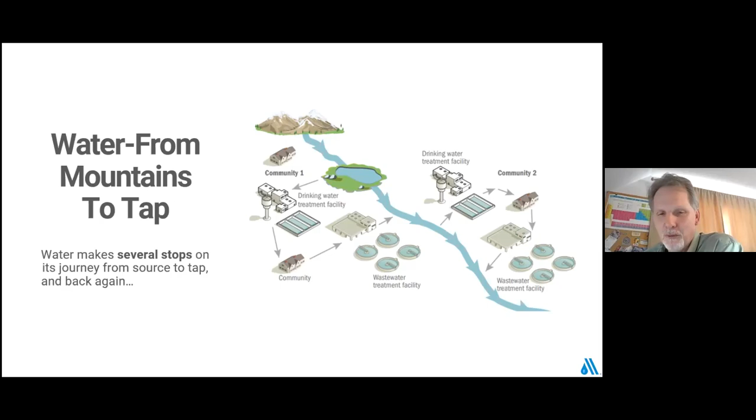Just ask yourselves right now, it's 3:30, 4 o'clock in the afternoon. If you had to guess how many times you've used tap water today, could you get close? My guess is most of you would underestimate. Most folks do, even though it may not be a bunch of water at one time, between brushing your teeth or making some breakfast or some tea or some coffee or washing your hands. It certainly is used far more often than most folks realize, because largely in the US, you can count on the water to be there when you turn the tap on. And that is not the case in a good part of the rest of the world.

And I meant to give you a statistic there when we talk about the importance of the provision of safe drinking water, and I got sidetracked as I was looking at the day in the life of a drop of water diagram there. But each year, according to the World Health Organization, there's an estimated 2 million deaths worldwide related to waterborne disease. About 90% of those deaths are children under the age of 5. Things like cholera and dysentery, typhoid, things of that nature.

And most of you in attendance today would probably be pretty hard pressed to name the most recent or the biggest waterborne disease outbreak that you've heard about in the United States, or even besides a waterborne disease outbreak, a water quality issue that impacted the health of the community. Certainly Flint, Michigan is one that most everybody's heard about over the last few years. But in terms of a waterborne disease outbreak, that's part of how effectively we apply the multiple barrier treatment concept in the US. And I'll talk about that here in a few slides.

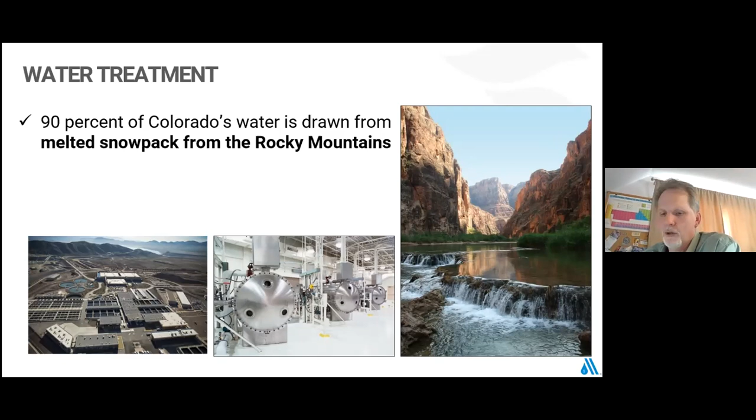So I mentioned just a few minutes ago that about 90% of our water is drawn from the snowpack in the Rocky Mountains. But as far as our water resources go, like I said, all the folks are on this side of the mountain, and Mother Nature and gravity take most of our natural rainfall to the west. And that creates some water resource issues and constraints, certainly here in the Front Range.

If it's in and around a city, there's any number of things. It could be runoff from roadways and impervious surfaces, vehicle fluids, things of that nature. More rural areas, it might be impacted by agriculture or septic systems that aren't functioning the way that they were designed. And just simply runoff with soil and sedimentation and turbidity and things of that nature. Wildlife and their waste streams. So there's stuff in that water that needs to be removed in order for it to be safe for drinking.

So coagulation and flocculation are key to effective filtration practices. If we were to take a mud puddle after a good rain, and we were to scoop it up in a clear pitcher, and we would just let it set on a table for an hour, and we were to come back, we'd see that down in the bottom of that pitcher is a pretty noticeable layer of silt. And this is the big stuff. This is what's going to settle out naturally without any help from us.

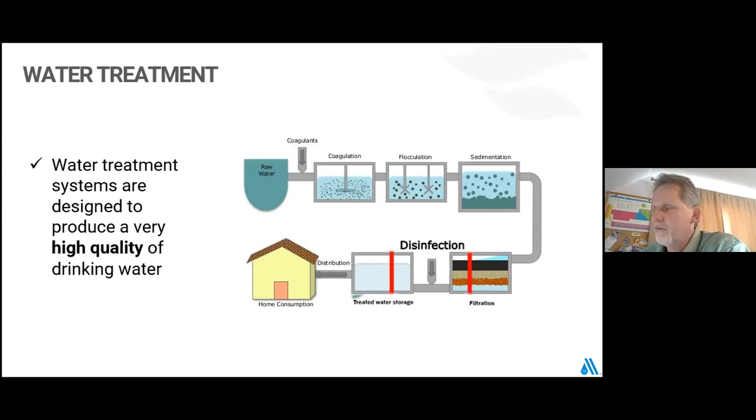And the more dirt and stuff we remove, the more bacteria and virus and microbial contaminants that can cause public health issues are being removed. And then we try to disinfect later in the process. Now that we've removed a lot of the interfering contaminants or substances, now we can disinfect, and a much larger percentage of the disinfectant goes to inactivating microorganisms and virus, as opposed to being soaked up by the dirt and other stuff that's in there. So this is all kind of part of this multiple barrier treatment concept. They're all critical.

And, in the interest of time, I want to give you a flyover so we can spend more time talking about GIS. But what sort of professions, what sort of skills really lend themselves to being in this industry? A big, wide range. Operators don't even really necessarily have to have a technical background. It certainly helps, but if they don't know chemistry and biology, but they have a mechanical aptitude, there's a place for somebody to be an operator, because that's part of what they do too, is inspecting pumps and pipes and valves, and if that stuff doesn't work, then the water treatment process doesn't work either.

Maintenance engineers, design engineers, laboratory technicians, and then certainly planners and schedulers. Anytime that we have large projects, whether it's a large pipe replacement project or a treatment plant capital improvement project, that isn't something that you just decide to roll up your sleeves and get busy next week.

It needs to be planned over time so that the appropriate people are brought in during the right phase. There may be plant shutdowns or parts of the system that need to be shut down to facilitate the project. That has to be planned in advance.

In some way, it's kind of similar to a roadway project. You can't just shut down a major highway for an indefinite period of time. You need to plan the project to minimize the impact on the operation while you're trying to help it along the way.

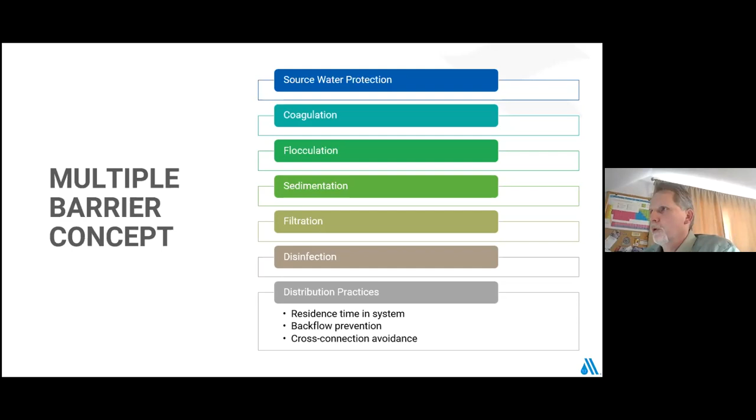So why do we need those? Well, I guess I'd say don't put all your eggs in one basket. Any one of these barriers can fail for some reason. We could think about Boulder, Colorado. We could have a 100-year flood, and there can be more turbidity than we would normally have any reason to expect coming into the plant.

It's not designed for that. So we can still, through coagulation and flocculation, settle a lot of that. We can filter it, we can disinfect. And so we have multiple tools in our box for when life throws curves at us.

Also, some of the microorganisms that we're trying to remove, like viruses, are so small that they can pass through filters. So we need to have coagulation and flocculation to catch them and clump them into larger particles. And if somehow, some way, something still passes through all that, we have the disinfection process to inactivate them so that they can't make people sick.

it might be too hot or too cold, or the pH is wrong, or maybe there's a disinfectant present, they have the ability to, in essence, go into their shell and hide from those harsh elements in their environment. And then when they're in the right environment, which might be after a person's ingested them and they're down inside a warm-blooded animal, they can come out and become infective again. So they're resistant to disinfection.

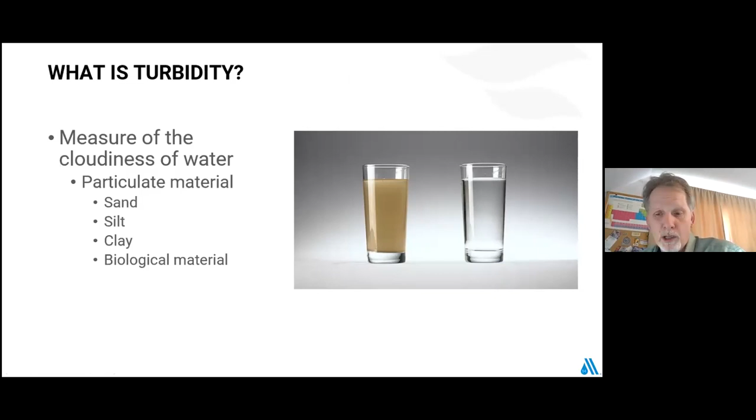Let me see if I can back up a slide here. Okay, so this water right here on the left would be probably maybe 100 or 200 NTU. That's some pretty muddy water that you might see in a mud puddle or in a creek after a good rain. And then that looks like treated drinking water, something you might get out of the water fountain or your tap. And that's probably 0.1 NTU or less. So very, very clear water.

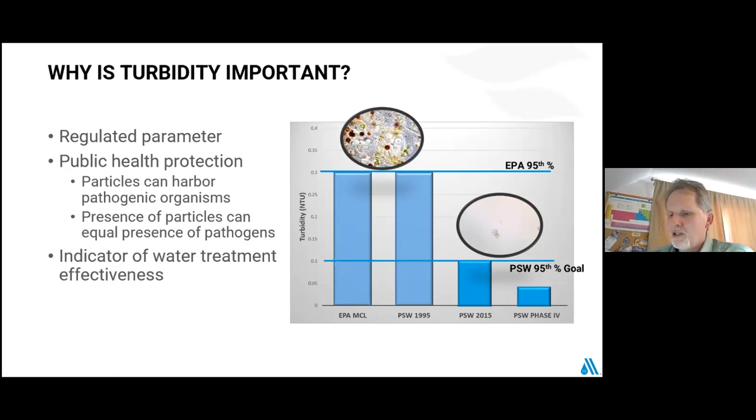So you come over here and you see microscopically, even though this water on that inset of the slide on the top is 0.3 NTU water, it complies with the regulations. Microscopically, you go, whoa, there's still stuff going on in there. But as we go down towards 0.1 NTU or less, comparatively, it's a snapshot, but you see that that's much, much cleaner water. As we start to really look at cyst removal, I looked for this slide. I'll try to find it and send it to you guys. But I wanted to keep this in here even as a blank.

As we go below 0.1 NTU, Giardia and Crypto, they have the cyst forms. They're in the range of say 2 microns to 10 microns in size. They're very, very small organisms. As we go below 0.1 NTU in water, we see an exponential rise in the log removal. We see much, much higher percentage removals of these cyst forms. So we're not killing them or inactivating them, but we are removing them from the water. So the cleaner the water, the better job we're doing of removing these types of pathogenic organisms.

We talked about water distribution. It'll be great for you guys to go back and look at this, but I talked about it already as part of the multiple barrier treatment concept. And it is the last mile. You can do all the good in the world to treat the water, but with all this construction going on and infrastructure, you have pipes anywhere from brand new to, I'm sure the city of Denver has water pipes in the ground that are more than 100 years old. It's a fact of life in most metropolitan cities. Some of them maybe quite a bit older. You might be shocked to know how old some of the pipes in the ground are.

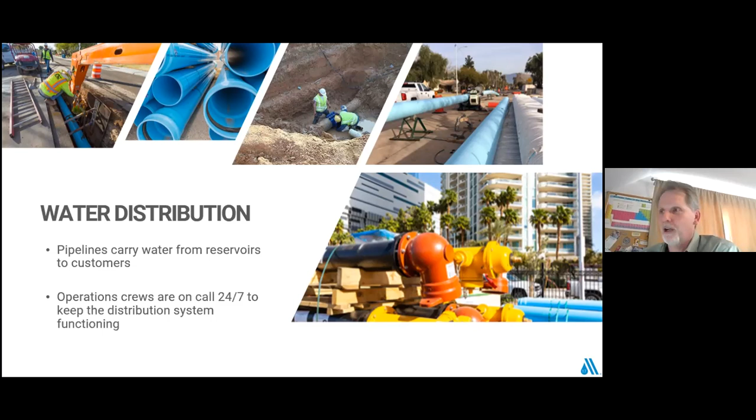So, just a high level overview, distribution systems are very, very complex, right? The way that I typically describe a water treatment plant is kind of like the heart of the city. And then the distribution system, you have these major, like your aorta, large vessels that carry it away. And as you get further away from industry and downtown and into residential areas, now your arteries are smaller and smaller. Think capillaries, right? So anywhere that you have a rupture along the way, now you have a problem with the circulation in this overall body that we're talking about.

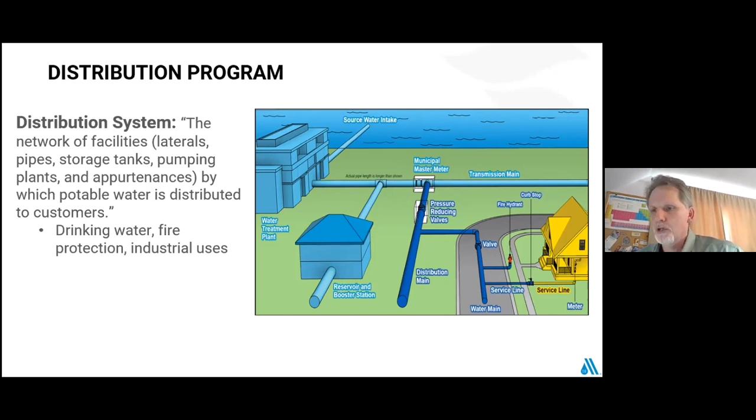And we have thousands of restaurants and businesses that are all tapped into this and have the potential to have something go wrong in their treatment process or their backflow protection that could impart contaminants. So there is a lot more going on at any water utility than just treating water and putting it in the pipe. We need to shepherd it all the way to the end user.

Maintenance is all part of this as well. I'll talk about this at the tail end, but I wanted to give you a really good idea of the universe of jobs and skills and backgrounds that it really takes to provide safe drinking water, to study our natural waters, to treat wastewater effectively. And there's about a couple of dozen different types of jobs and careers that somebody with GIS skills could immediately plug in and be a huge part of a successful team.

Water system maintenance, asset management programs, knowing exactly where your infrastructure assets are. Obviously, it's not just mapping. There's a ton of information resident in those files. Date of install, materials of construction, any sort of other thing like that. And so that's all about turning data into information so that folks can do their jobs more effectively.

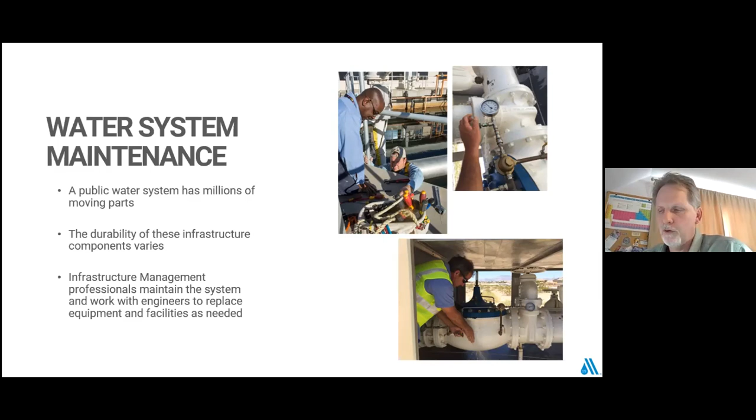Now, I said from source to tap and back again, the wastewater treatment process, and I already alluded to the removal of phosphorus as being a key concern in the US. Corrosion control on the drinking water side: as science has advanced, we're really starting to key on the use of phosphorus to sequester lead. If you were to go back into the early 1900s, there were a lot of cities in the US that not only used lead preferentially, some of them by ordinance required it.

And if you ever stop to think about the origin of the word plumber, the Latin word for lead is plumbum. So it really comes out of lead, and that's the reason that plumbers like to use lead. It's easy to bend. It doesn't kink like copper. And so it wasn't anything about health. It was easy to work with and it didn't leak. And so it was used an awful lot.

So, GIS wasn't a thing back in the early 1900s, but as we update our asset inventories, where stuff is and what stuff is, converting those old analog or index card or post-it note type records into GIS inventories of assets is more than a quantum leap forward for these systems and being able to protect public health.

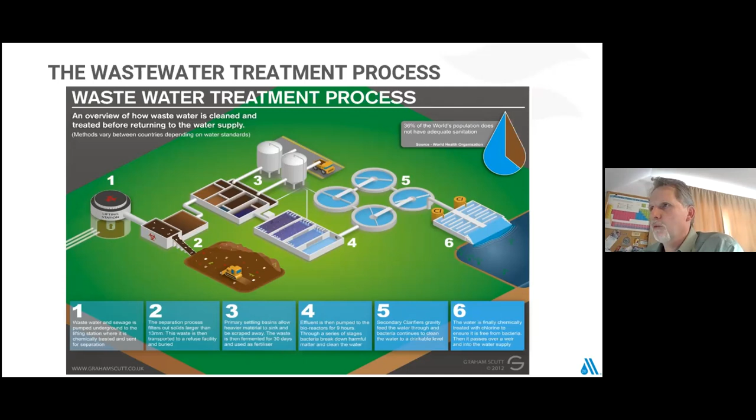And then the wastewater treatment processes have to work in concert with the drinking water utilities in the town, because whatever drinking water treatment facilities are putting into the water, that's something that wastewater plants need to know about. They ultimately have permits to meet before discharging back to natural waters of the state. And that varies depending on what part of the country you're in. We're in a pretty environmentally conscious part of the country here.

I did my doctoral work in Reno, Nevada, and Lake Tahoe is right there, probably about as environmentally conscious a part of the country as you could find. And so you tend to have tighter wastewater discharge limitations in those parts of the country than you might have, say, along the Mississippi River, where they lean on dilution being the solution to pollution a little bit more.

So I'll do a light speed overview of partnership programs, because I want to give us plenty of time to talk about GIS and then have some discussion at the end. So all the stuff that we've been talking about over these last 30 or 40 minutes, the partnership programs that I manage, the continuous improvement and optimization programs, help utilities look at their treatment processes and their distribution management processes, to assess how we measure up against industry standards. Are we going above and beyond regulations?

We aspire to do more than meet a 0.3 NTU turbidity standard. We like to see our systems be at 0.1 NTU or less, because that is a much superior water that is much more protective of public health. And I apologize, I can't remember, but there may be a slide in here about the genesis event for the partnership.

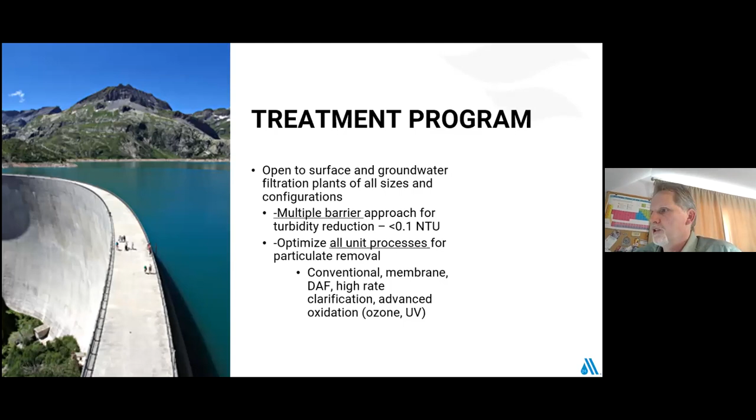Distribution program, I've already talked about an overview of all the challenges and priorities. And we asked them to look at all sorts of considerations. How well do they maintain residual? Do they have a main replacement program? Do they maintain their tanks? Do they clean and inspect their tanks with some routine frequency so that they're not impacting water quality? What about their backflow and cross connection prevention and control programs?

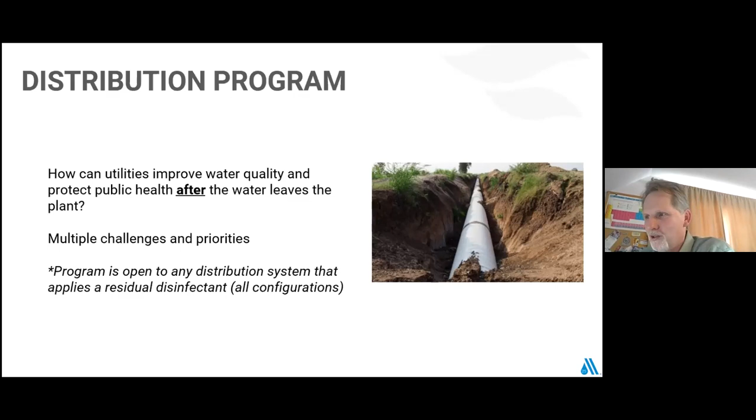All of those things force them to take a deeper dive into, are they really doing the best that they can to protect public health, or are they just striving to comply with the minimum regulations? We already talked about the turbidity guidelines. So right now, if you were to look at the surface water treatment rule, an absolute slam dunk, you have broken the rules, would be 1 NTU.

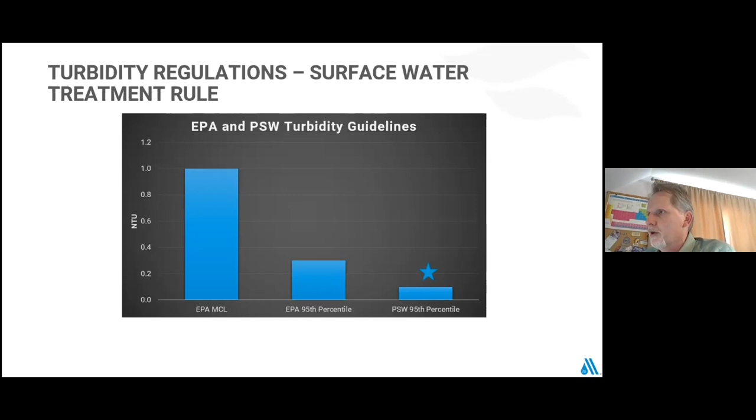But further than that, what the surface water rule requires is that utilities be 0.3 NTU or less 95% or more of the time. In our program, and you see in the bar to the far right, we ask utilities to strive to be at 0.1 NTU or less more than 95% of the time. And you'll recall that comparison of the microscopic slides from just a little bit earlier.

And actually our excellence plants, which is the very highest level of performance in our program, are at 0.04 NTU, 99% or more of the time. What they have found over time with this commitment to continuous improvement is they can always find ways to do just a little bit better and improve on their efforts to protect public health.

And then we also have the Partnership for Clean Water, which is a wastewater treatment optimization and energy usage optimization program as well. It's the newest of the programs, but we have about 120 wastewater facilities around the country that are part of this. All in all, the partnership programs and the facilities that are part of them serve about 140 million people on a daily basis in the United States. So a little bit more than a third of the country is impacted by this adherence to these optimization principles.

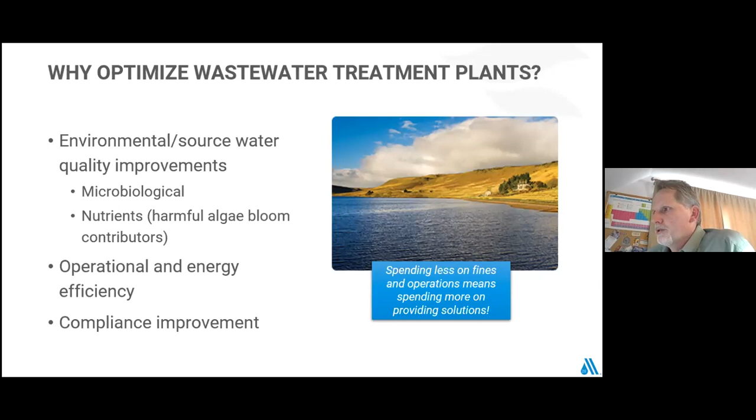I think you guys understand why we would want to optimize wastewater treatment plants. We talked about reducing nutrient loading out there, which can certainly decrease harmful algal bloom issues, eutrophication issues. Wastewater treatment's hugely energy intensive as well. So there's an opportunity to do the most good economically by further optimizing operations.

So we try to go above and beyond regulations. We certainly want to be tenacious and avoid complacency. We don't want to just comply. We want to do the very best we can, since we're in the business of protecting public health.

There are utilities that have been in these programs for 25 years, and they continue to find ways to get better and better over time. All right, so I made you all sit through all that. Let's talk about some GI science and technology in the water industry.

So you get it. I am all in for drinking water treatment and environmental stewardship. We want to protect public health and the environment, but how does, and I'll say GIS, please forgive me, but I'm so used to referring to it that way. How does that fit in? Any number of ways, okay? And this is just a smattering.

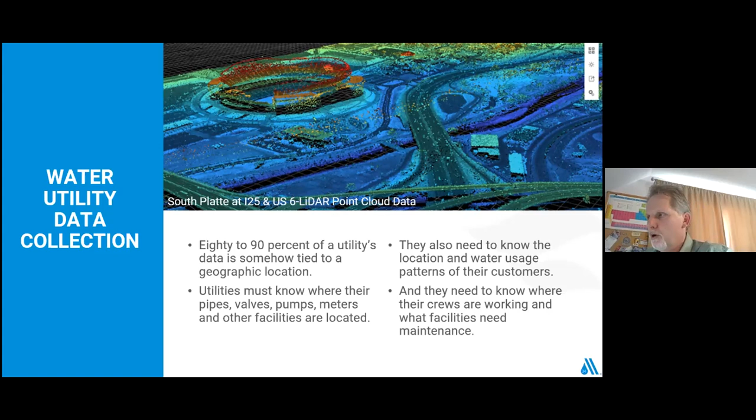So water utility data collection. Over the last 15 years or so, utilities have continued to migrate towards the data being tied in somehow to a geographic location, whether we're talking about our source waters, lakes, streams, reservoirs, all of that. Once you get on the finished water side, it gets even more complicated, with the pipes and valves and pumps, and all sorts of information, the material of construction, the date of install, and specific data elements and attributes. And so it continues to be leveraged more and more by water and wastewater utilities and consulting firms to turn data into information.

So it's much more commonly used at water utilities now than it was by a long shot at the start of my career. One of the things I'm seeing is a very quick analogy to laboratory operations. In labs, there's a ton of data being collected, microbiological data, physical data like turbidity and temperature and stream flow, chemical data. But turning all that into something you can make sense of is a challenge. A lot of chemists and biologists are great at collecting data, but this other side of it, how do you do that? How do you manage it?

Well, what typically happened over time is we would put that into what we call a LIMS, a lab information management system, because we're reporting primarily for compliance purposes, but I've always been a researcher. So we're doing all sorts of stuff about natural waters, and if we were to change this in our operation, how much more good would it do? Our LIMS people in the laboratories tended to be that chemist or biologist that, as a hobby, loved computers. They said, well, I'll take a look at that, and they'd take us as far as they could. And some of those folks are really talented.

And why tell you that story? That's the way a lot of GIS departments have sprung up at utilities. You have an engineer or a technician or a scientist that, I'm sorry to be this informal, but they like computers. They go, well, why don't you go take a look at this GIS stuff? At City Utilities in Springfield, Missouri, the third largest utility in the state of Missouri, that's the way their engineering GIS department started more than a decade ago.

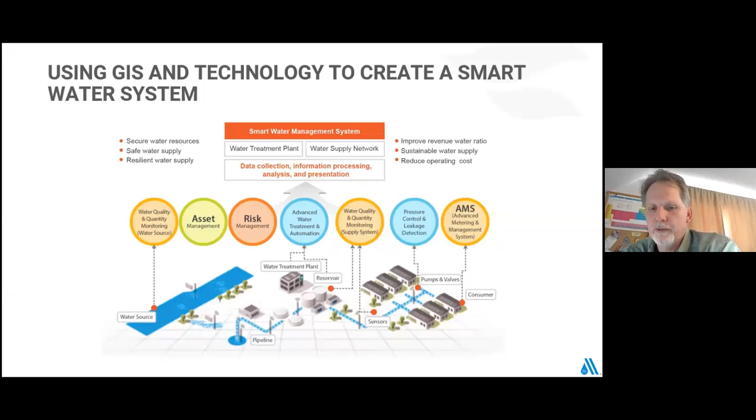So whether it's water quality and quantity at the source, the asset management, and the state of the infrastructure, and then there's all sorts of information that we collect about pressures and flows, turbidities, temperatures, chlorine residuals, all of that. There is a mountain of data that this technology helps us to turn into information to make informed decisions in support of the protection of public health.

I love pictures. I love pictures way more than words, and I'm only partially joking, because if you think about the mountain of information every night when you watch the weather forecast that you absorb in about 3 minutes of their time, that's what they're doing. They're turning all of this, the projected rainfall or temperature information, the high for the next day across the entire state, into a map that people can absorb very, very quickly.

And I think that's one of the things that, for my money, is hugely important in the application of this. We see folks use it for the protection of water resources or natural resource management. We also see it on the finished side too, whether it's areas of high usage, areas where we've had to go fix the same main over and over, whatever the situation may be. For me as a water quality manager, it seems like we're going back to that same part of town with the same water quality issues.

We need to take a deeper dive at the hydraulics of that area. Is it that the main materials are impacting it? Do we have a dead end in that area that we weren't aware of? And it allows you to go, wait a second, I was getting buried by all of the data. Now I clearly see that there's an issue over in this part of town, and we need to go investigate this. So it absolutely helps us do a better job in fulfilling our mission of environmental stewardship and public health protection.

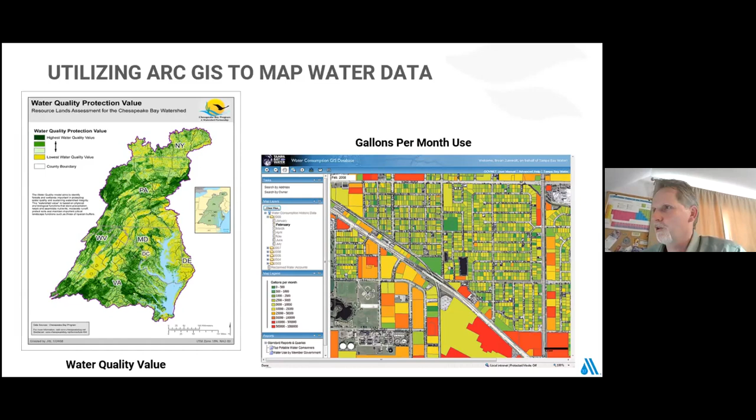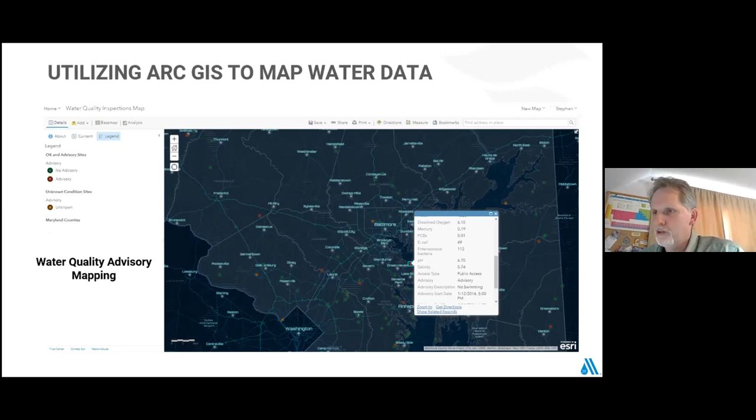We can even dial down here, and it may be a little bit hard to see, but this is one of our utilities. They use this and they tie it into all these different locations, water quality data, and they have triggers set in there so that if it falls outside their specified range, it flags them. Hey, take a look at this. Again, it's turning this enormous amount of data into information that people can absorb and act on. And so it can raise flags for areas of concern much more quickly than somebody looking at spreadsheets or poring over pages and pages of data would typically be able to.

So Central Arkansas Water, and this is a partnership utility. And I apologize, I'm not intimately familiar with the slides here, but I know the people at Central Arkansas. I've known the person over this program for a long time. They're the largest water utility in all of Arkansas, serve nearly 500,000 people, 2,500 miles of pipe. And I know they're kind of the poster child for a utility starting to really come into its own with leveraging GIS and technology.

So 3 water plants, 2 water reservoirs, a total watershed area of 115,000 plus acres. And you can see they use the GIS information to assess watershed landscape, and they use it for informed decision making, right? And so I would say these folks are well ahead of the curve of most utilities. And for a lot of the utilities I know, to follow their blueprint and learn from them would be a wise endeavor.

They use it for all sorts of things, whether it's where their vehicles are and routing them for the most efficient workflows. That 2,500 miles of pipe, I don't know the exact number of hydrants, but I'm guessing they probably have between 10 and 15,000 fire hydrants. Now, fire hydrants are hugely important for a water system, for fire protection, obviously, but we use them for water quality management. And any system should be touching those and inspecting those on an annual basis to the extent possible. You have to really be certain that that thing's going to work when you need it to. Otherwise, structures burn to the ground.

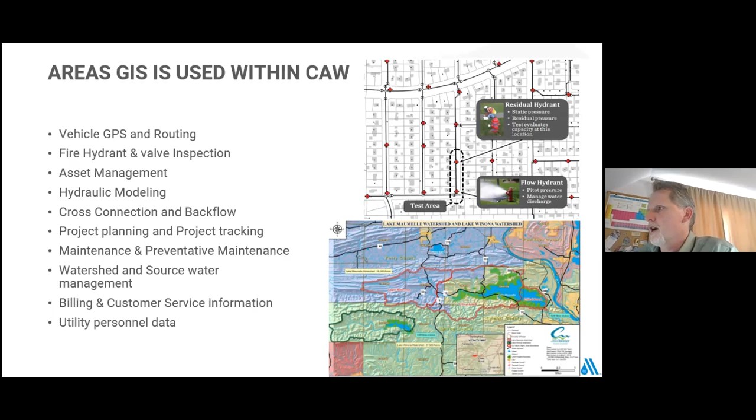Hydraulic modeling, asset management, a lot of things that we've already talked about throughout the first part of this presentation. Watershed, source water management, billing and customer service information. Is there a difference in usage patterns that might help us detect whether or not there's a leak occurring in an area or at a residence? All of that sort of stuff is what Central Arkansas Water is applying their GIS and technology to. And so they have found any number of ways to just get better and better. They've even used it during the pandemic.

And so declaring water as an essential need to citizens, obviously washing hands, people need water to drink. But one of the things you might have also heard about in some of the reporting, especially down in Texas, and maybe your average citizen doesn't think about, is there are a lot of folks that have to have water. They may have some medical need. There are people that need electricity at their house because they may have an oxygen pump that they have to have on for COPD or any number of things. And so this is another layer of information about their customer base to say, well, everybody needs water, but for some of these, it is even more a pressing matter of life and death.

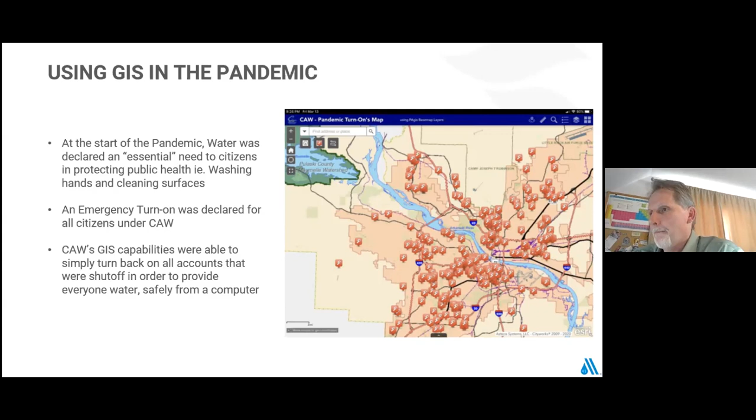So in the future, what are some of the things they want to use it for? Working smarter, not harder, whether it's for upgrades or maybe having more information at the fingertips of field personnel, outage notifications. If they have a planned outage or an unplanned outage, they can send out notifications by text or by call or email if they have that information for the customer. So the sooner they can get word to the customers, the more responsive they're being to their needs.

As far as mobile applications, I can tell you that the Aurora Water Department, they have a secure mobile GIS package where it's a smartphone, so it's not the same as a laptop, obviously, but they can look at pressures, they can look at segments of pipe, they can look at all sorts of information wherever they have a cell signal, and they're very, very proud of it. The person that's over that was somebody in their distribution department that had an affinity for computers. And 20 years ago, they said, why don't you work on this? And he's still there 20 years later. He's just continued to learn and find new and innovative ways to leverage the technology for making sure their distribution system's doing what it should.

Another example, Denver Water. I talked about lead service lines and the need to get lead out of the system. There's really no safe level of lead, according to CDC and EPA, especially for young kids, typically under the age of 5 or so, and in those developmental stages, it's particularly a concern.

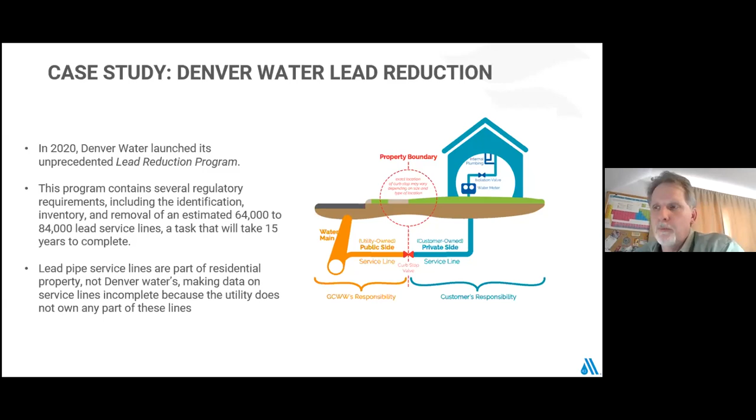They're putting all that into the 21st century now, so that they can make more and more informed decisions, and they're going to go get the lead out of the system. And so that's an example right here that's probably impacting some of the folks on the call today. They just may not know that they have a lead service line.

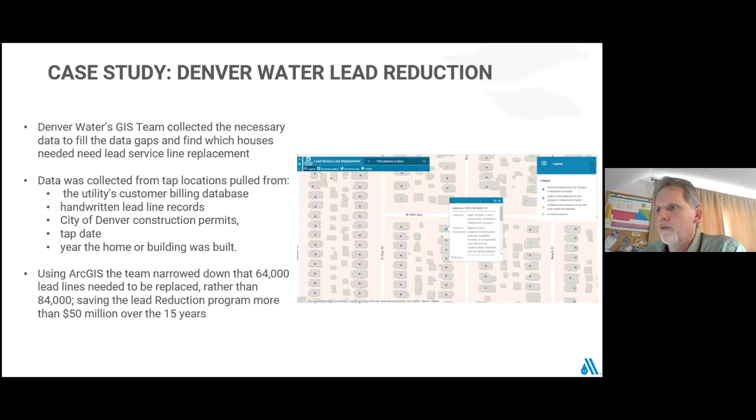So they've identified this. They originally thought they were around 84,000 or so lead service lines. Through this detective story and going back and putting all this into ArcGIS, comparing against construction permits and handwritten records, they realized that they're about 20,000 below that. They're in the range of about 64,000. They still need to get all of those out, but this will represent a total savings of around $50 million in that effort. That's what those additional 20,000 or so lines that they thought they had before leveraging GIS capabilities would have amounted to, an extra $50 million in expense.

And then you all go, well, you don't even know the half of it. There's a ton of stuff you didn't even mention that's going on. And so that's why staying plugged into the academic community has always been a big priority for me.

So what about careers? I mentioned a half a dozen or so. There are tons more types of careers within water and wastewater. Like at Central Arkansas Water, they have a GIS department now that's strictly dedicated to the application of this across all of their many efforts that we talked about. But also within engineering departments, the folks that are out there collecting data in the field on natural sources, in research endeavors too. I've done a lot of research throughout my career.